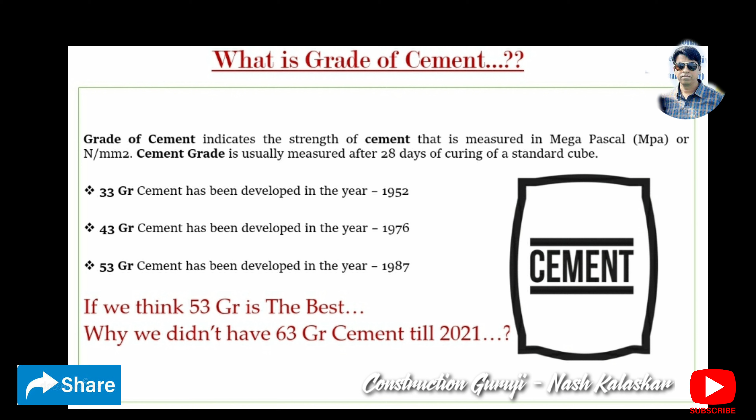Now we will discuss what is the grade of cement. The grade of cement indicates the strength of cement, measured in megapascal or Newton per mm square. Cement grade is usually measured after 28 days of curing of a standard cube.

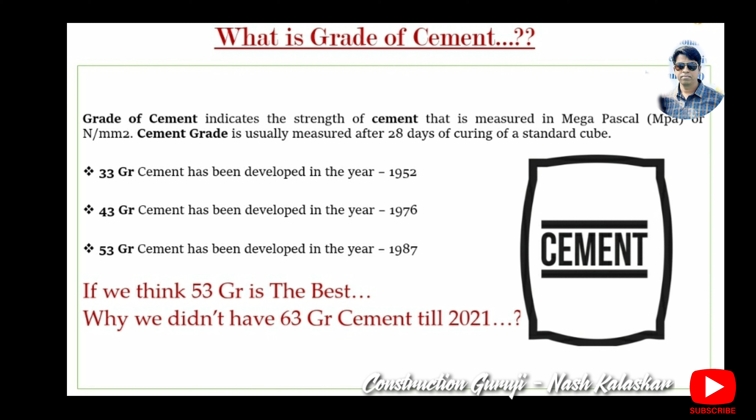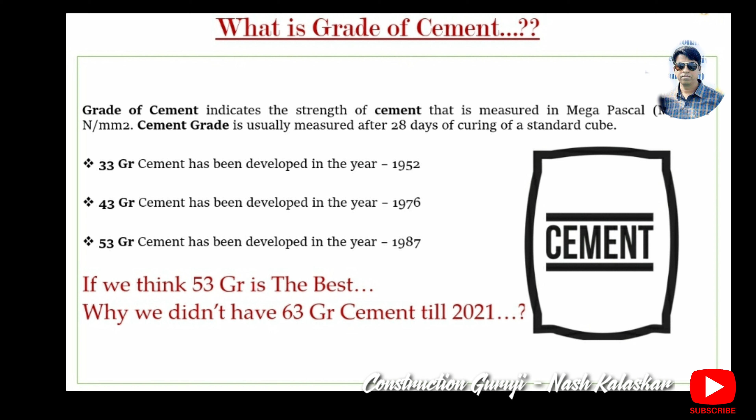If you take ordinary Portland cement, it is subdivided into three types: 33 grade cement, 43 grade cement and 53 grade cement. The 33 grade cement was introduced in 1952, 43 grade in 1976, and 53 grade cement was developed in 1987. Most people think 53 grade is the best cement for any concrete work. But if 53 grade is best, why don't we have 63 grade cement till 2021?

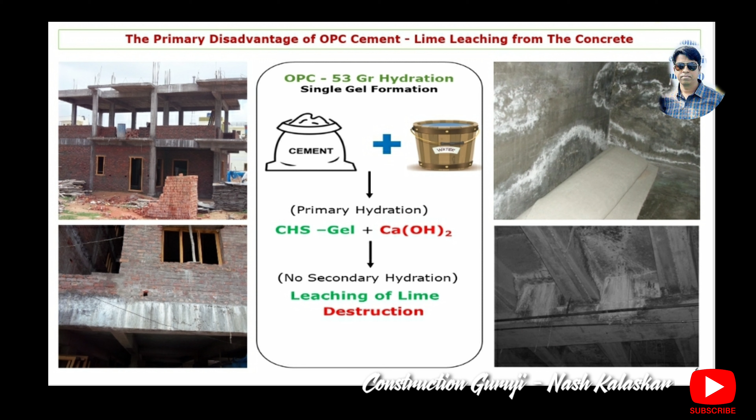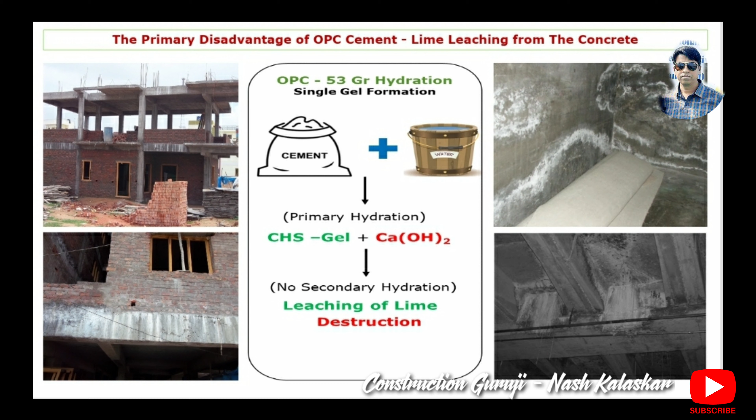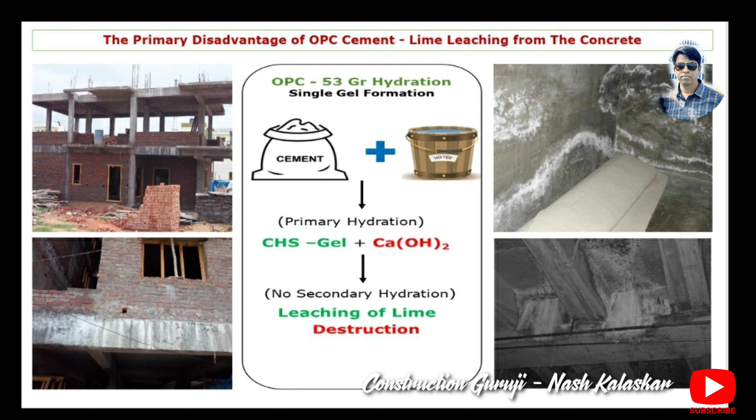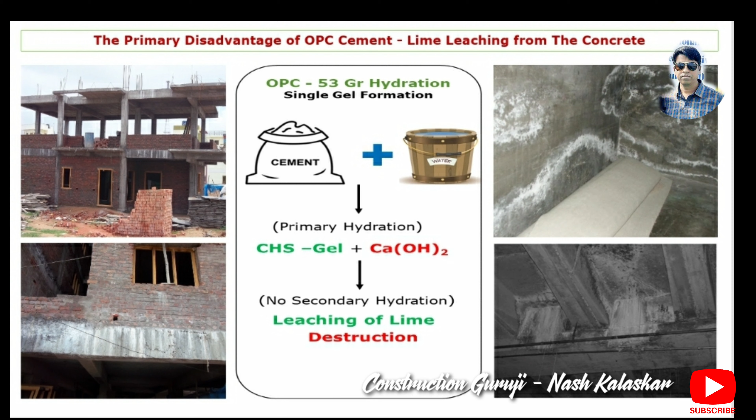The primary disadvantage of OPC cement is lime leaching, from concrete and from mortar. When you add water into cement, the primary hydration process starts. In this primary hydration, only 70% of lime converts into strength and 30% of lime leaches from the concrete. This is one of the biggest problems in ordinary Portland cement of any grade. You can see photos of different structural members, buildings, wall surfaces, beams and slabs, which are affected by efflorescence and lime leaching.

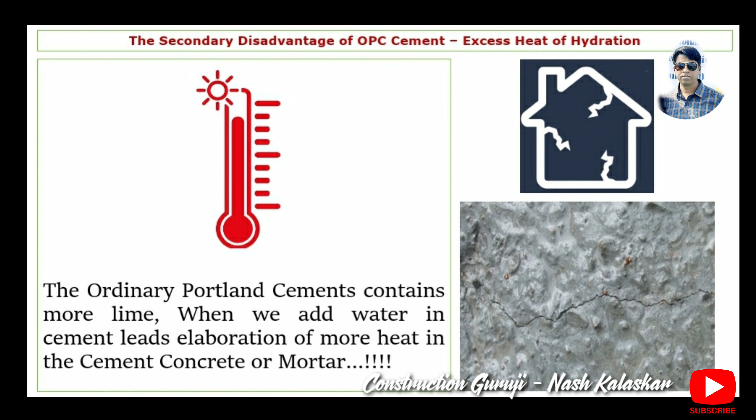The second disadvantage of ordinary Portland cement is excess heat of hydration. Ordinary Portland cement contains more lime. When we add water into cement, it leads to elaboration of more heat in the cement, concrete and mortar, which will lead to cracks in different elements of the structural member.

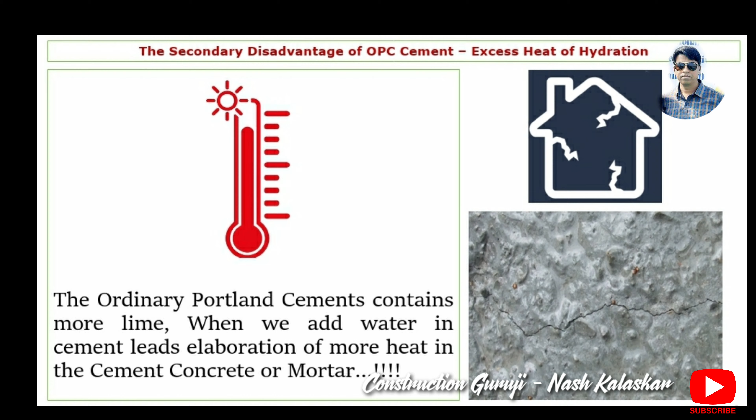The third disadvantage of ordinary Portland cement is more pores, less durability. The lime leaching creates more porosity in the concrete, which reduces the life of the structure and creates more maintenance cost for the structural member. With more porosity, the structure will face severe seepage and leakages.

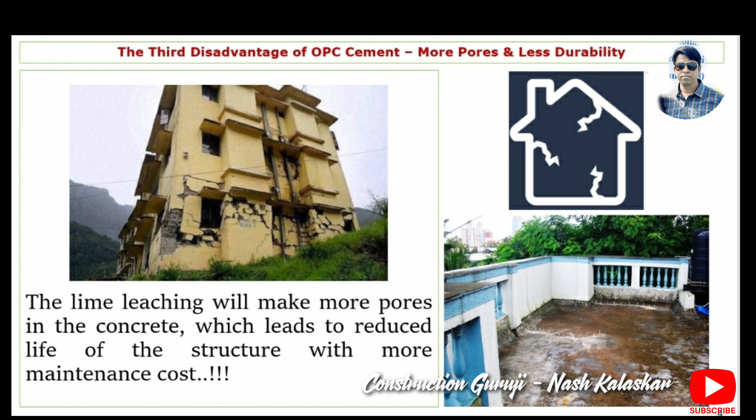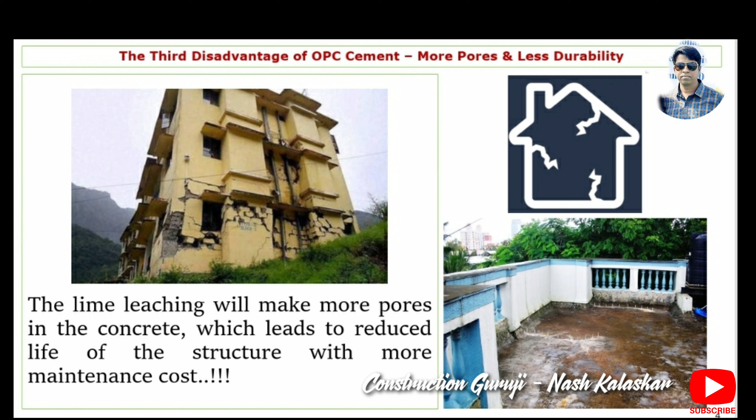These are all the problems which we face from ordinary Portland cement of any grade, 53, 43 and 33. That's the reason we developed a new product, Portland Pozzolana Cement. Now we will discuss Portland Pozzolana Cement and its advantages and durability.

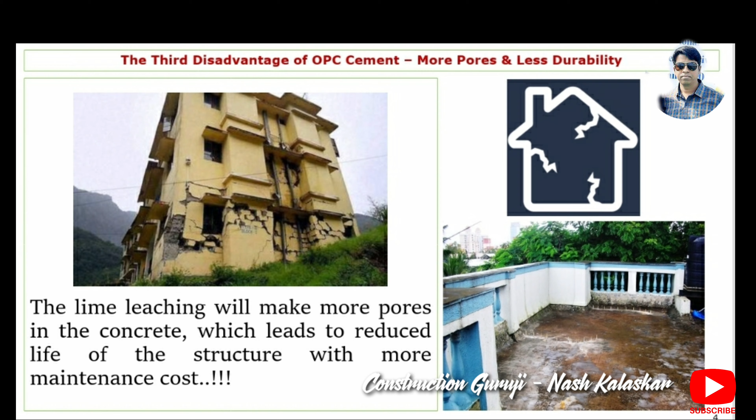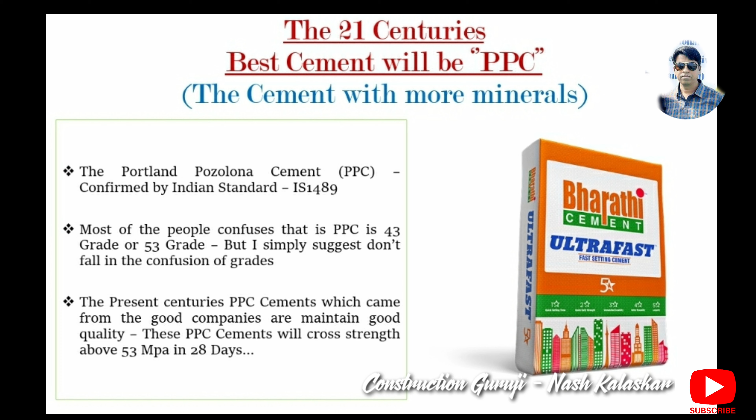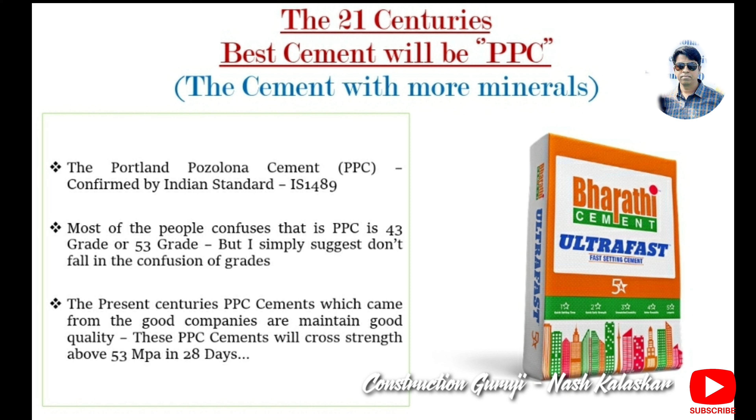Now we'll discuss Portland Pozzolana Cement. The 21st century's best cement will be PPC, Portland Pozzolana Cement. PPC is confirmed by Indian Standard IS 1489, and most people are confused whether PPC is 43 or 53 grade. I simply suggest don't fall into the confusion of grades. Present century PPC cements, which come from good companies, maintain good quality, and these PPC cements will cross strength above 53 MPa.

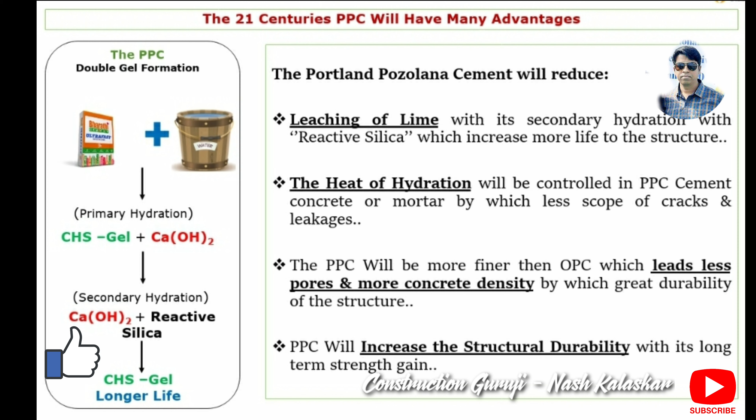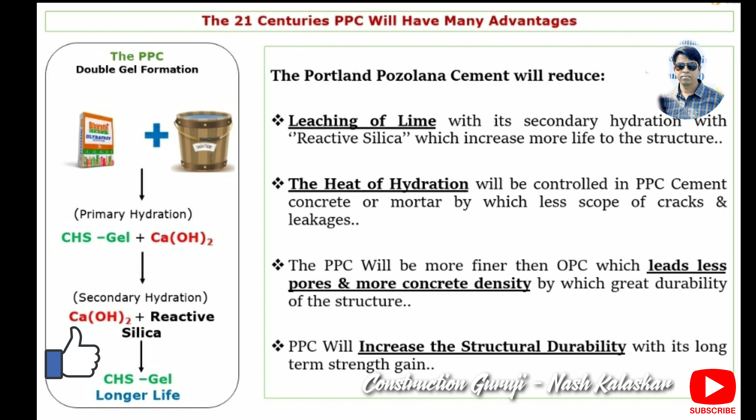PPC has many advantages. If you take the chemical reaction of PPC, it is very different compared to ordinary Portland cement. In ordinary Portland cement, we have only one hydration process, but in PPC we have a double gel formation. When you add water into PPC cement, the primary gel formation starts. In this primary gel formation, 70% of lime converts into CSH gel, and another 30% of lime reacts with reactive silica and forms CSH gel. So we have a double hydration process.

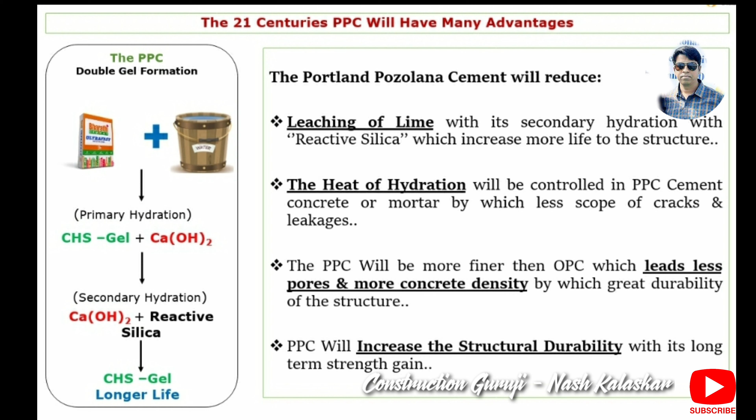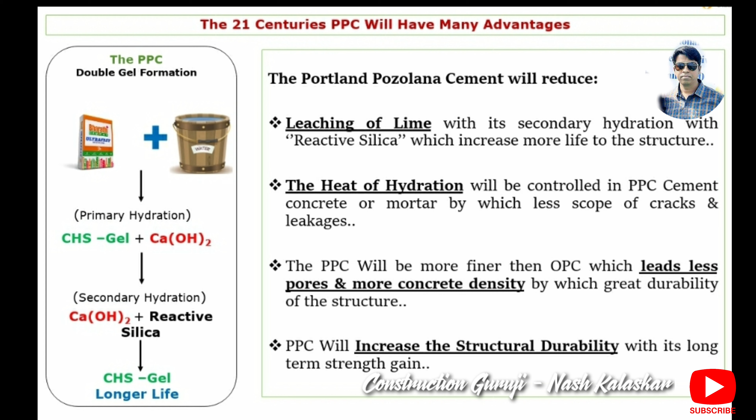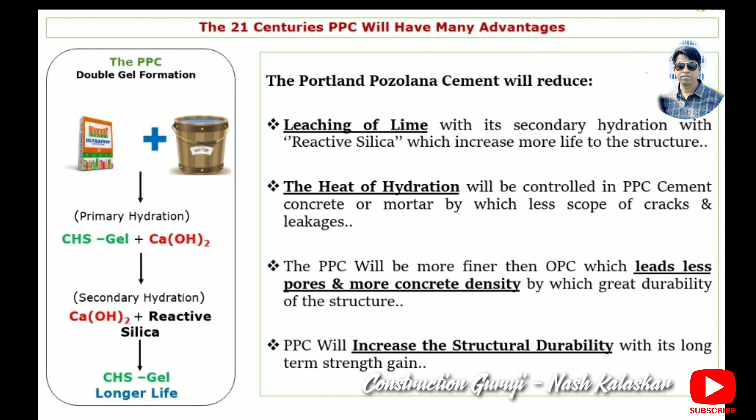There is no leaching of lime, there is no loss of lime. All the lime will be converted into strength. With PPC, we have many advantages: we can reduce the heat of hydration, and PPC will be finer than ordinary Portland cement, which leads to less pores and more concrete density, giving great durability of the structure. PPC will increase structural durability with its long-term strength gain.

Now the conclusion: we can go with Portland Pozzolana Cement, and we can use Portland Pozzolana Cement for any structural member, from concrete slab to masonry wall.